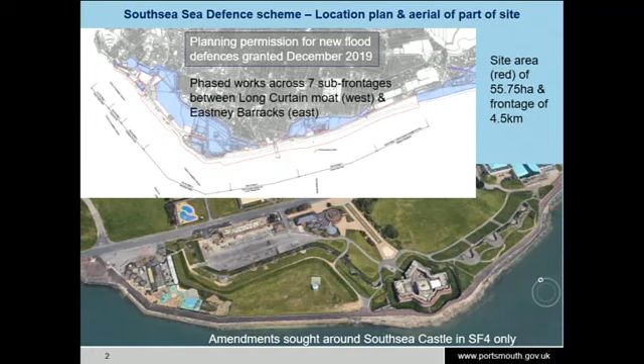Many of you have probably seen this one before, but I included it again because up in that top left corner it shows overtopping events, and in the fourth of those sequence of images is Bandstand Field underwater, part of sub-frontage 4 where the amendments are taking place. The other examples there are breach events, and they're not the only ones that have happened along the frontage.

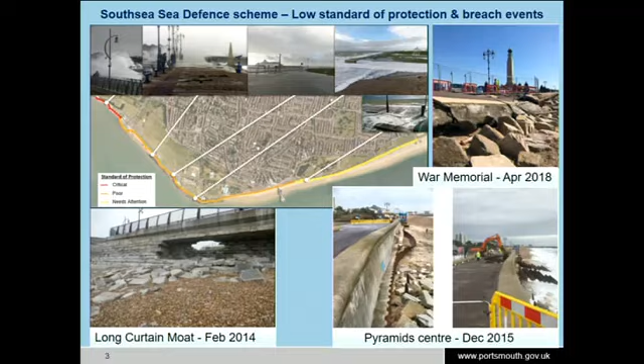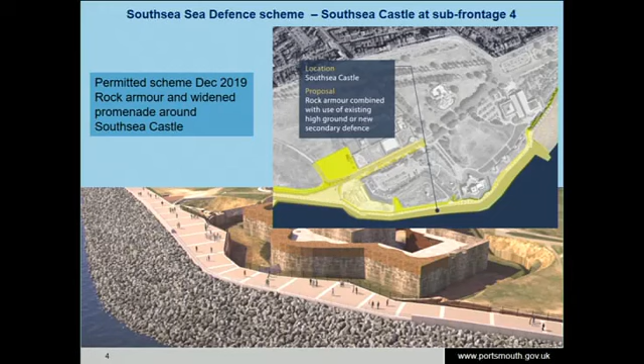This was the scheme granted in December 2019 for sub-frontage 4. You've got a widened promenade that's raised and a rock armour revetment with the high ground behind it being the secondary defence. That is essentially unchanged. In a nutshell, less rock and a wider promenade in the form you see in the top image there. A 4-metre wide promenade at an upper level, 4 tiers of terracing, and a 6-metre wide lower promenade, and then the rock revetment beyond.

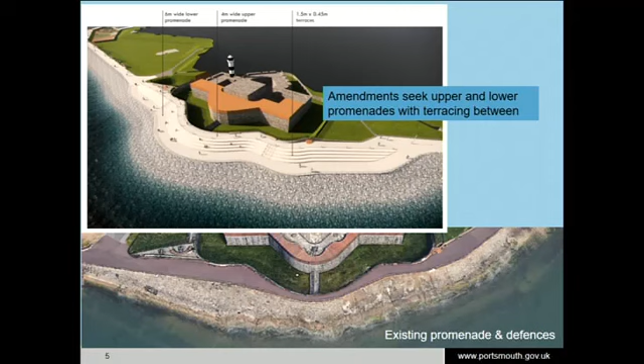It's really hard to try and show you the scale of the changes as a comparison, and I was hoping this might be a little clearer. The image at the bottom is a full cross-section from the pinch point of the promenade that you may be aware of. On my screen it's sort of a pink colour, but the rock armour is reduced, and beyond a red line that I've added, you can see two layers of rock in black superimposed over a wider extent of rock on that image. I won't dwell on that one.

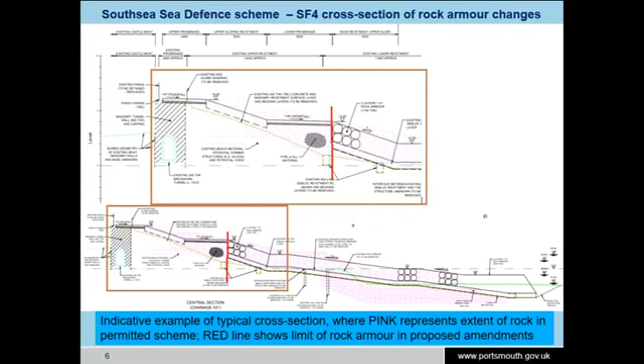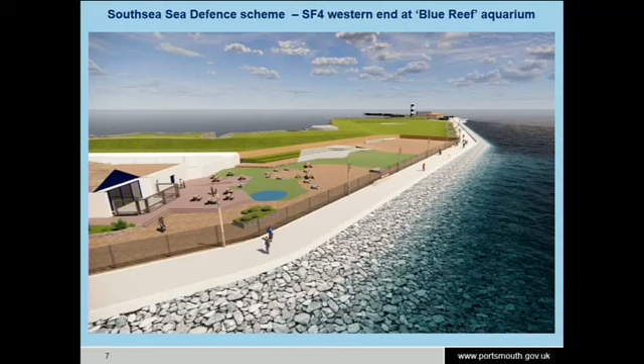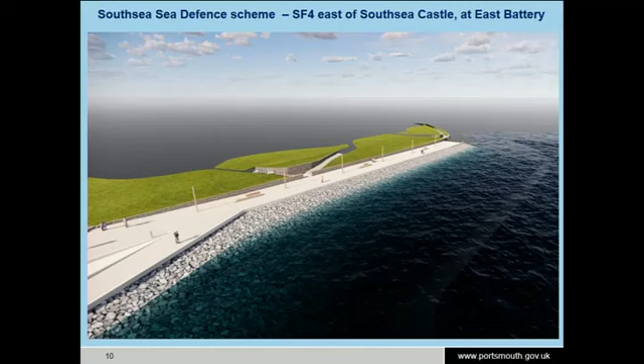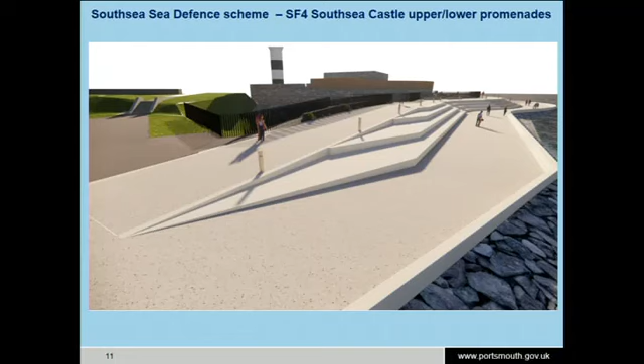If you go to the next series of images, this is the scheme in 3D visuals. I'm showing you visuals because trying to show them on 2D plans, you really don't see an awful lot of information. So here we are, Western End, near the Blue Reef Aquarium. Next image takes us to Bandstand Field. Around Southsea Castle itself. East Battery. This is where the upper and lower promenades split or meet, depending on perspective. This is at the lower promenade, looking at those terraces. That's on the terracing, looking back towards Bandstand Field.

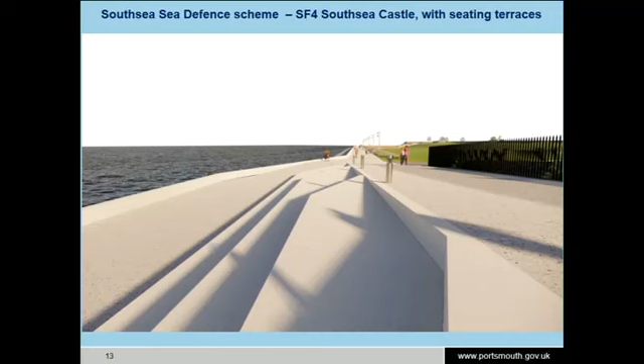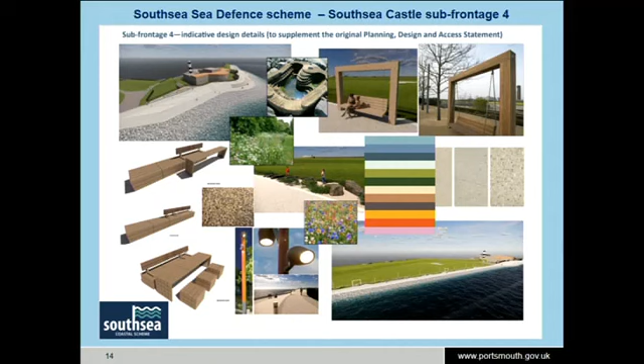It is EIA development, for which there is an environmental statement. It's the same environmental statement as you will have had to consider back in December 2012, but includes an addendum to deal with the impact of the design changes to this sub-frontage 4 only. You've also got key responses from statutory consultees. Natural England note the environmental impacts either remain unchanged or see minor improvements, and Historic England summarise the design changes as an improvement and significant benefit to the scheduled site.

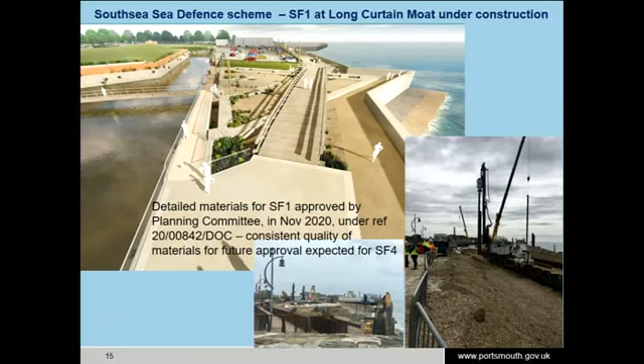Councillor Atkins: I just wanted to be absolutely clear, I think probably everyone in the committee understands, but just for complete clarification. We've seen quite a lot of this report before and already given permission to a lot of elements of the coastal defence scheme. Today it is a request to vary something which relates to the whole scheme, but in terms of the different types of sea defences used, it's only proposed to change one section of the design we've already approved, which is the section around the castle, in order to create the two-tier pathway. Is that correct, essentially? That's perfect. Absolutely.

Yes, a lot of the things requested in the deputation are covered by the conditions. Councillor Atkins: that's precisely the point I wanted to make. The deputation makes an interesting and potentially good point about rock pools - would this site be possible to incorporate vertical rock pools to enhance biodiversity, and does anything we decide today affect that? I asked this question in the pre-agenda and got a fair reply.

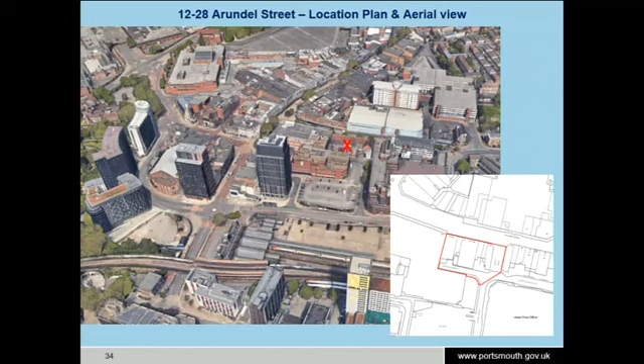The application is for a student purpose-built halls of residence and commercial redevelopment on the ground floor. It's a Part 7, Part 28, Part 21 storey building. You can see the site on the screen, on the southern side of Arundel Street, immediately adjacent to the previous Debenhams building. We'll just flick through - there's the site. The proposal is a substantially tall building containing 591 individual study bedrooms for students and 3 commercial units on the ground floor.

As Jose takes us through some of the images I'm sure you're all fully aware of, we'll pause there. Members will notice we've slightly amended how we present things in your agendas, so we have a lot more imagery in the agendas as well, so I'll try to fly through the imagery to make it a bit easier.

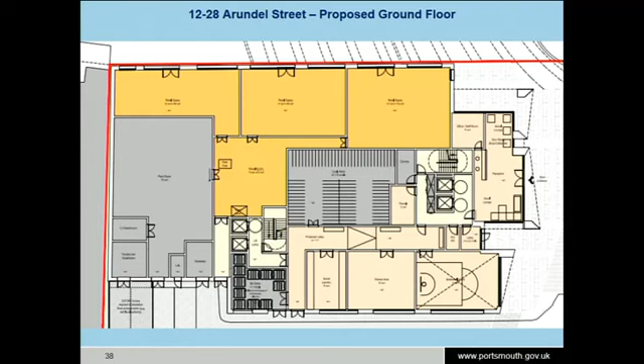As we go up the first floor, again on that eastern side, this is the facilities for students. You can see recreational spaces and study spaces facing outwards, and then the beginning of the mixture of study bedrooms on the first floor and going upwards.

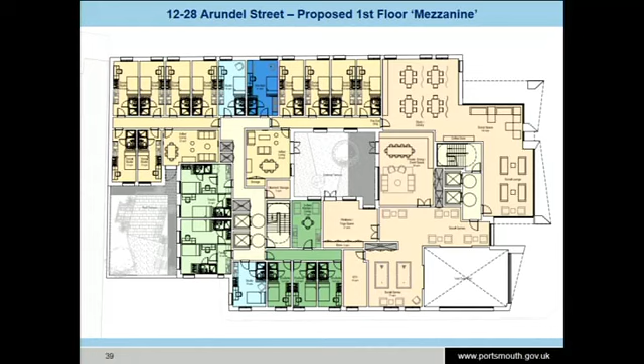You will also note external roof terraces and an internal light well. It obviously goes up from there with the variety of mixed space.

Some are individual bedrooms, some are studios, i.e. bedrooms with ensuite bathrooms sharing a small kitchen. Some are arranged in the cluster flat formation. Flick through those as you go up.

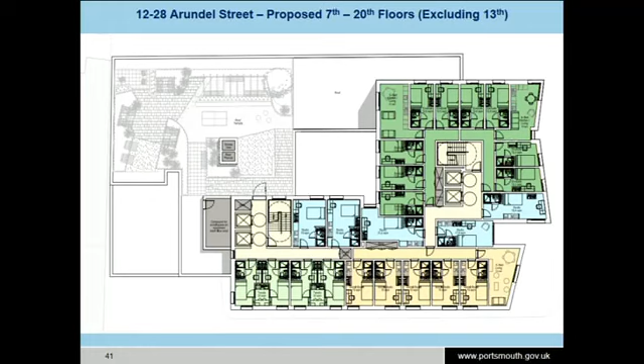So you have another 7th story roof terrace there, and as you'd imagine, student bed spaces as we go higher still.

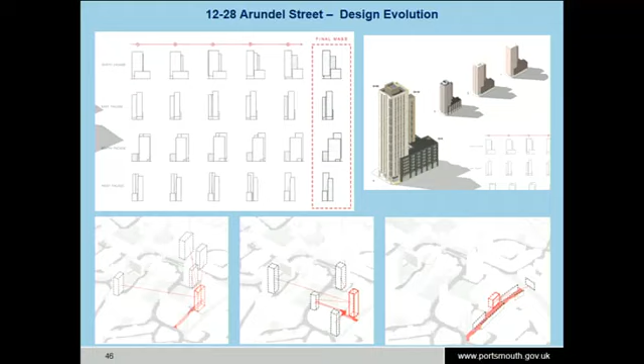The building fronting Arundel Street is a 7-storey building, so it has a very human scale. It's relatable to those that are walking up and down Arundel Street and approaching it from the east and west. And the 2 towers set behind it, of 21 and 28 stories, equally will be viewed in those larger images.

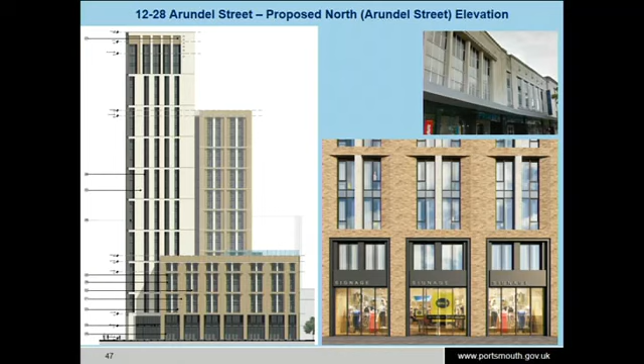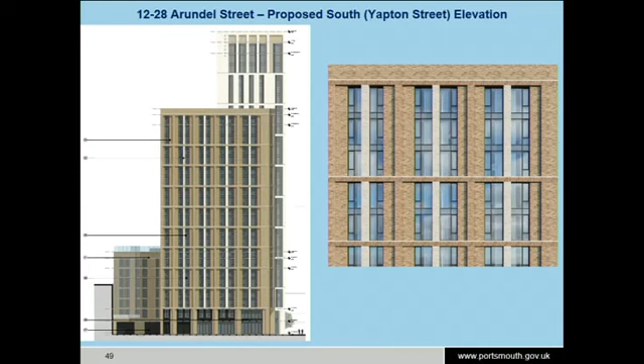As we flick through those, which I think are self-explanatory, I'll just note there are no objections from any statutory consultees and 3 letters of representation raising concerns, as mentioned in your reports.

I will pause there. As you can see, it is a tall building, undeniably. Members will be aware that the law regarding tall buildings and building safety associated with fire safety are changing and have changed.

The procedural issues associated with them affect only buildings that are submitted for planning permission after the 1st of August. So the procedure for considering fire safety for tall buildings is unaltered for this scheme, and it's what you have always done, which is obviously to consider fire safety in the round, recognising that building regulations will match and control fire safety issues.

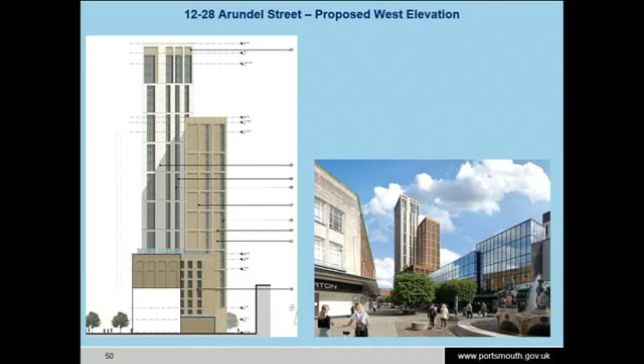We have worked closely with building control, and they are satisfied that all appropriate fire regulations within the building regulations have been properly considered. Keep going.

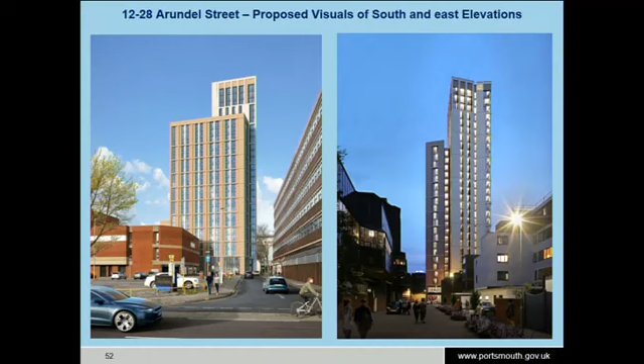So the building is principally, obviously, in the city centre. It sort of straddles the 2 character areas in the 2013 city centre master plan SPD, which does support both tall buildings, in line with our tall buildings SPD, and focusing opportunities for growth and development that would encourage and transform the city centre's economic, social and cultural focus, as covered in the report.

As mentioned, on the ground floor, and you can see the corner of the building there, that's Yapton and Arundel, it has 3 commercial uses and then the entrance to the student space, so it's all active frontage all the way around, a big change for what we have along that eastern and southern elevation at the moment.

3 commercial spaces. I'm saying commercial, not retail, because as you know, the use classes order has changed, and all commercial and service uses are lumped together now. So it will be for the site owner to market those and occupy them with either retail or food and beverage. A cafe could go in there, or indeed any of the other uses within use class E of the use classes order.

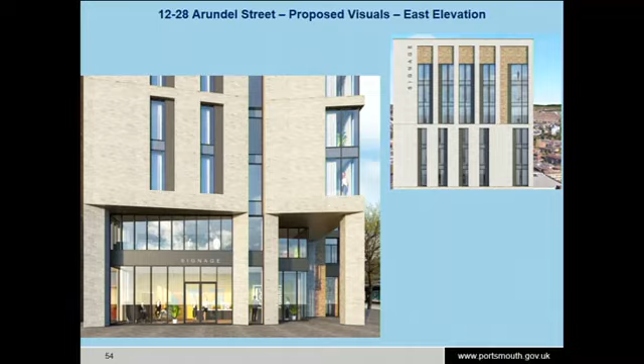It is a tall building, so it will cause some shadowing in Arundel Street, but there is obviously already shadowing in Arundel Street from the existing buildings in the area, and again we're satisfied that that's not of particular concern.

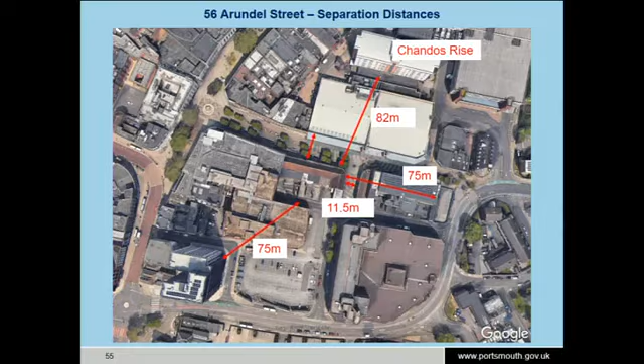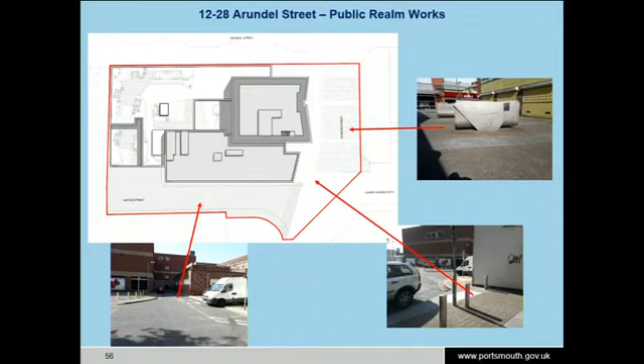The applicant has worked closely with the council's landscaping officers to look at the specific immediate public realm around the building. There's some well-valued, high-quality public realm landscape on Arundel Street at the moment, which we're not looking to remove. But as we turn the corner into an area that isn't publicly attractive now but will become more active with this development, negotiation has achieved a £50,000 financial contribution to the council so that money can be spent on improving that public realm, based on illustrative schemes the landscaping team have been working up. Specifically, a Section 106 payment would cover that.

The scheme has no objections from any consultee, so issues such as ecology, drainage and SuDS have been built into the scheme from first principles and are entirely acceptable to your professional officers.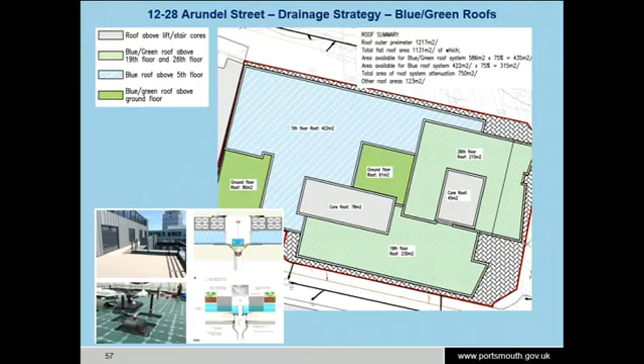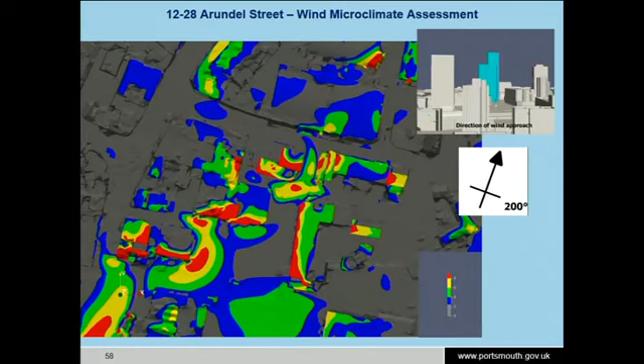Brief mention of microclimate - all tall buildings have those impacts. We are satisfied full microclimate modelling has been carried out. While there will be a little additional wind coming around that corner, that's largely in the carriageway and is of no concern to officers. We're satisfied that's not a reason to withhold planning permission.

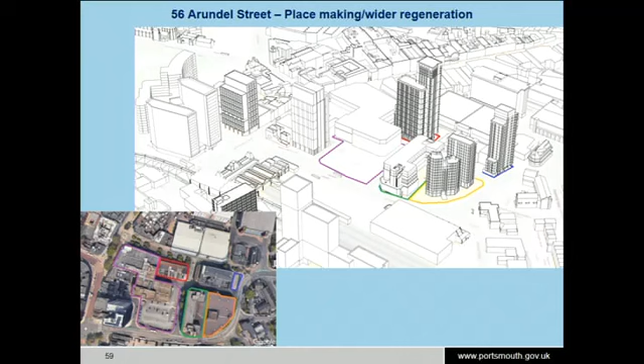The purpose of this is to highlight the context that this is a tall building. It will be the second tallest residential building in the city, but this is an area of substantive change, most recently and going forward. We anticipate a need for higher density, taller buildings in this part of the city centre to support economic growth, meet our housing need, and regenerate the activity the city centre offers the wider community. So while it's a tall building, we're entirely satisfied that in its immediate context - the 7-storey building on Arundel Street - and in longer views and wider townscape, it will be appropriate and will be one of many buildings seen as one approaches or moves around the city in the skyline and cityscape of Portsmouth.

Just flicking through my notes to make sure I've covered everything. There is an extensive number of planning conditions dealing with both the specific management of the site and some details we're looking to nail down, such as architectural detailing of windows, etc. We're satisfied that covers all those necessary matters.

I've covered amenity to neighbours, which I think is important. Would note highways impact - no objection from the Highway Authority, but there is a slight under-provision of cycle storage. There's 176 spaces for cycle storage within the building, so while that's slightly lower than the arithmetic of the parking standards SPD, we're satisfied that's a reasonable design for it.

The ecology of the scheme - both bird aware and the nitrate nutrient neutral solutions - have all been built into the Section 106 and agreed with the applicant. On top of that, the site is liable for around £2.5 million of CIL, as mentioned in the SMAT, which would deal with other infrastructure issues in the wider city and immediate locality.

In conclusion, it's an ambitious building, but one we think Portsmouth deserves. It deserves that ambition for its city centre, where we need to focus our growth and opportunity. It brings back a secondary frontage into active usage with new viable spaces on the ground floor, and it provides for a need in the city - 591 student bed spaces, equivalent to around 236.4 homes when measured against the government standard methodology for homes - and will meet that need for students, ideally attracting them out of poorer quality accommodation elsewhere in the city into this location, where they can more easily access the amenities of the city centre and the university itself.

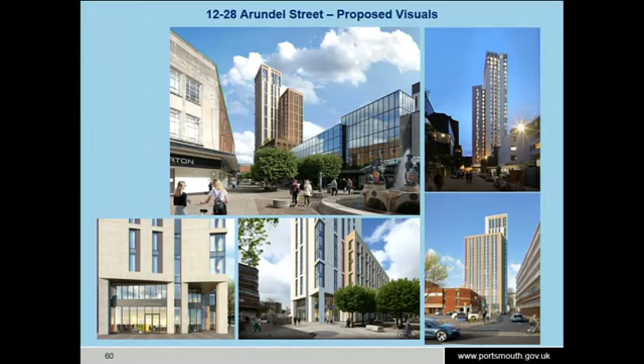Thanks for that reminder. Yes sir, what's your name? Because you weren't here when I first came out. I beg your pardon, it's Michael Lampard. Mr. Lampard, would you like to give your deputation? Thank you, yes, I'm Michael Lampard, I'm an architect, I work for Christopher and Wright, we're Fusion Students Architects, and I'd first like to thank Ian and Eze and Gary, who's not here, for the time they've taken with us to define and refine this scheme, and also thank you to the councillors for considering this today. So the application provides, as Ian's identified, student accommodation, 591 rooms in the centre of Portsmouth.

We believe it's much needed in the city, helping to free up HMOs, as we just discussed. The student demand report identifies a continuing need for students in the city and good quality accommodation, which Fusion provide. As I said, we've undertaken extensive discussions with your internal team, so thanks for that as we've gone through the process. We've also undertaken a full day of design reviews, which was very positive and helped us refine the scheme, and we liaise directly with stakeholders and the wider public through our communications agency, Marengo.

So throughout the process... I don't mind. Joe, beg your pardon, if you go out at this stage you won't be able to vote on it. Oh, okay, is that all right? Sorry, I beg your pardon. I know you didn't, I saw you heading off, I thought you might be heading for a drink of water. I'll cross my legs, is that all right? I'm so sorry. The alternative is that after the deputation we just adjourn for a couple of minutes, Chair. Would that be all right? Can we just hang on for a little break? Yeah, Joe, do you want to shoot off just for a few minutes? Oh, I can go now? Yes, I beg your pardon, I'm so sorry, everybody knows what you're about to do. Well, hang on, could we perhaps let the deputy finish? I do apologise, Councillor Hooper. Should we let the deputy finish first, perhaps, Chair? She's on her way now. Hang on, sorry, I beg your pardon, sorry to muck you about.

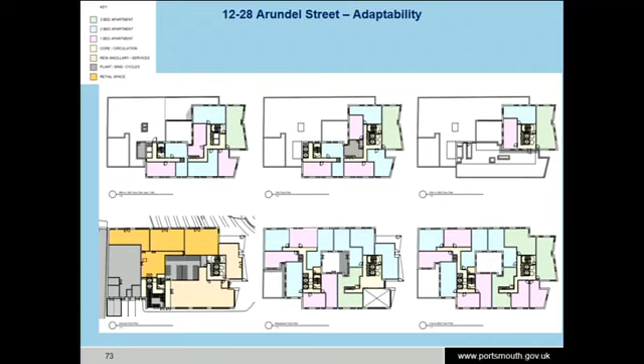I've been just looking at the street view and satellite pictures of the existing location here. And I'm asking myself, overall, do I want this building for the city or do I not want this building? And I'm coming to the conclusion, I think, on balance, it would be better for the city that the building be built than not be built.

Now, I don't think any of us are overly keen that it's student accommodation. We would rather see affordable housing. But I think one thing this applicant has done that does impress me a lot is considered the possibility of conversion if necessary. I think this is an area that is in bad need of regeneration.

And I think, as has been mentioned by others, this is a high-quality design building, more of the Gunwharf style, more of the type of regeneration that would fit with the future regeneration of the city centre. And I think particularly the different heights and scales of the different buildings. So yes, the tallest part is very tall, but it's not the whole site. It's a narrow area of the site. I think overall it will be attractive to the skyline and is suitable for a city centre location.

This isn't on top of a lot of other residential housing. There is some other, I do recognise there are other flats in the area, but it's not in a suburb. It is in the city centre. It will add much needed footfall to Commercial Road.

I think the building is high quality, the design is high quality, and the management that we've heard about so far of how the building will be managed for students is of high quality. So I think this is a building that overall will benefit the city.

I think something which was mentioned, and obviously CIL can always change as the building progresses and costs go up or down, but the idea of I think it was 2.5 million CIL for Charles Dickens is also extremely attractive. Even if it's a tenth of that, it's something we can do a lot with for that area and for other parts of that ward that could see the money improve.

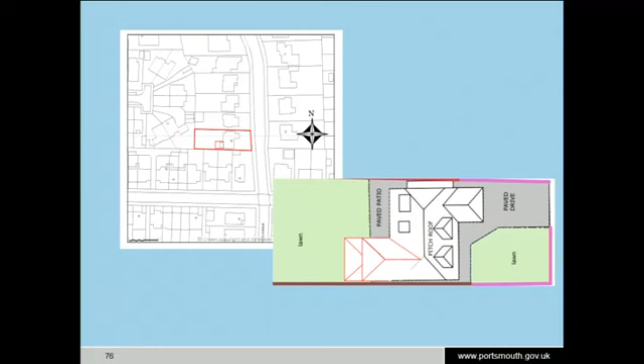When this application was put forward, we received a number of objections from nearby local residents and neighbors, especially those to the south, where we received 4 objections. The objections mainly refer to the depth of the development in question, the proximity to the neighbors' boundaries, the use of render rather than natural brick which would make it more compatible with the host property, and the loss of daylight and sunlight, including lastly the loss of privacy to rear gardens.

This application, as presented, had before officers had looked at these objections, the case officer had gone back to the applicant and requested further amendments to the scheme, mainly a reduction in the depth of the proposal and also changing the materials from render to materials compatible and similar to that of the existing property.

Officers have considered the issues and main considerations I've mentioned previously, and the neighbors' representations, and looked at the depth which can be seen in this slide - 4.7 meters for the first floor element of the proposal and 4 meters depth for the ground floor element. Officers' considered opinion is that the impact on amenity is mitigated, especially with the reduction in depth of the elements and with the materials changed to make it more compatible with the host property, and the proposal in question is due north of the gardens to the south.

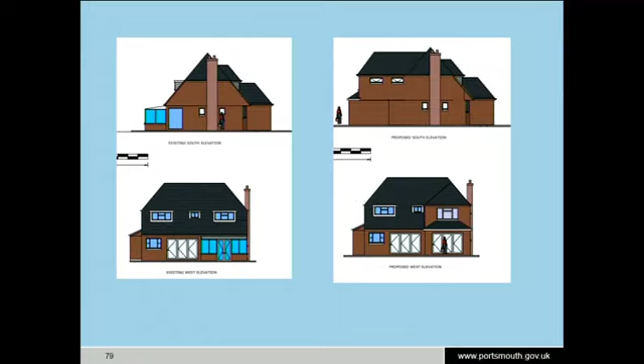I have a couple more questions if you don't mind me carrying on. One of the deputies submitted - I don't know if the planning officers have seen it - a picture where he's superimposed the extension onto the garden. I've had a quick look online and it looks roughly accurate. Would you agree that the extension does appear from the plans to extend beyond the boundary of 31? So it is - do you have any issues with it? Would you comment on it? Do you think it's an accurate representation of what the view will be like from 31 Mansfield?

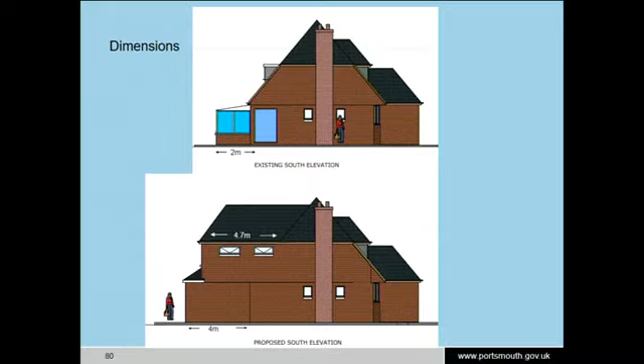Thank you, just one quick final follow-up related. I'm not in any way suggesting the deputy tried to mislead us, or that the picture isn't accurate - I'm accepting that it effectively shows a solid wall across his boundary fence, as the picture broadly describes. But it essentially says in 5.8 that officers considered the depth of the extension as originally proposed to be a little too much with respect to the neighbour's outlook to the south, and the applicant agreed to a reduction by 1 metre. I accept also that the bright render was taken away, which is an improvement.

There's a slight vagueness to that statement in the sense that it says a little too much. Is it open to the committee to consider it's still a little too much, or do you feel that you've now dealt with it as a result of the discussions and negotiations that have taken place?

If I may, members, officer reports are written for the audience, so yeah, obviously the language there has a little bit of vagueness. It's not just the depth we're looking at, it's the architectural interest. A straight up and down two-storey wall has less visual interest compared to what we now have, a bit of single-storey roof form coming into there, which they now have with the existing conservatory. So we're satisfied, as well as the change in the depth itself. 1 metre doesn't actually make that much difference, but it's creating greater interest in that architectural elevation in that you do have that chamfered corner.

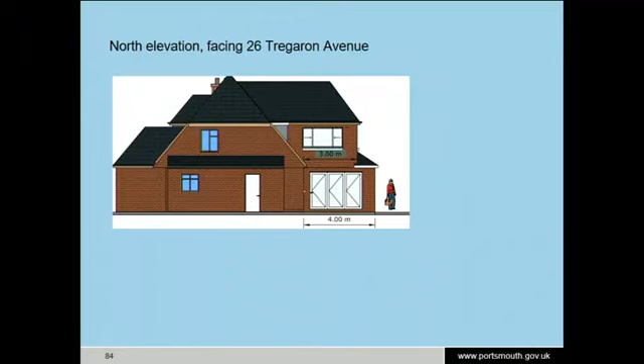Okay, members, if we can put the slides back up, the team did pull up some images, so it should be slide 85. Apologies if I didn't show them - they weren't part of the presentation because we wanted to see if anyone wanted to talk about it, because every application must be judged on its own merits.

The fact that somebody had a larger or smaller extension, I would stress, is irrelevant to your judgment. It's whether this extension is appropriate. A key distinction between 28 and 24 is, as the objector raised, 28 backs onto a rear garden, whereas 24 sits between side gardens - it's in a linear form, as you can see from the images here. I'd have to check the numbers, but gut feeling it's a larger extension by square meterage. I don't believe there's any fundamental objection to the scale of the extension as the character of the area - it's the impact of the extension on that facing neighbour that is the concern, and that's the judgment before you.

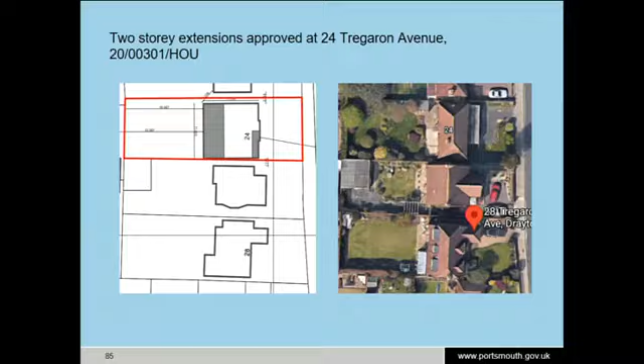Councillor Atkins: this might be a ludicrous hypothetical you're unable to answer, but do you think your advice would be substantially different if it was on the other side, next to 26, rather than how it currently appears, backing onto stuff to the south? If it was on the other side it would be side to side with other properties only - would that improve the situation or make it worse, or is that a ludicrous hypothetical?

I would say, Councillor, that if it was to the north of its own site, it would have a greater impact on 26.

Okay, Councillor Hooper, have you got any questions? Can I just quickly ask, in terms of the glazed window, there are two windows on that elevation - I'm presuming one of them was already frosted and this is making the other one frosted, so they are both... No? No, if I can assist members, on the south elevation they're installing two new high-level windows, so they don't need to be frosted, they're above normal eye height.

That's covered by the strict accordance condition. It's on the northern elevation, facing up to number 26, where there is a large standard window. That's the one we're requiring additionally to be frosted, because otherwise it doesn't affect either of the neighbours who have spoken to you today, but it does allow unobstructed views north towards number 26.

And my memory from the plan is that there is more than one window in that bedroom, so that there would be a view out. It has the high-level side-facing window to the south and a normal rear-facing window down the garden, which is appropriate for outlook. Okay, thank you very much indeed.

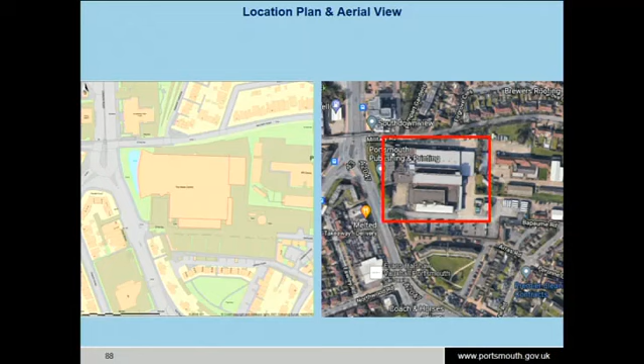And this just gives a view of the street view, and that is the proposed signage - we'll give further details in the next slide. The main considerations with this application are the visual and aural amenity, and also the impact on public amenity and safety.

Following receipt of the application and consideration, an objection was received from a neighbour with regards to the proposed signage, intended to be oriented to the rear of neighbouring properties, which will cause statutory nuisance, and again that there will be light pollution and disturbance at night, and further that the illumination would have an impact on bird life and local wildlife. Officers have considered the site and the surroundings.

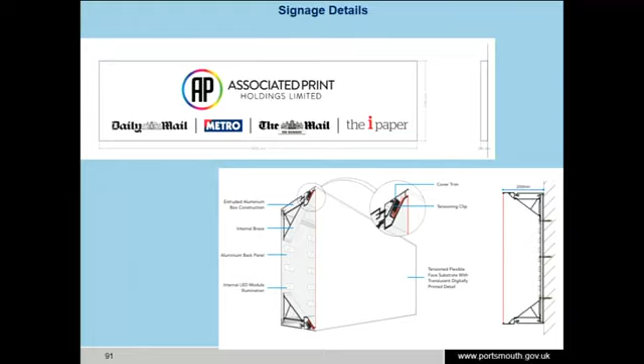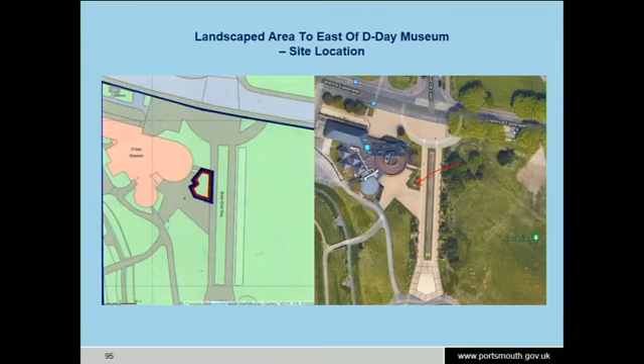The application site is located to the east of the D-Day Museum, and the site is within the conservation area. There's quite a lot of heritage assets - you've got Southsea Castle, and it's also included in the Southsea Common, which is an area included in Historic England's Register of Parks and Gardens of Special Interest. And there's a number of listed buildings and scheduled ancient monuments within the immediate area.

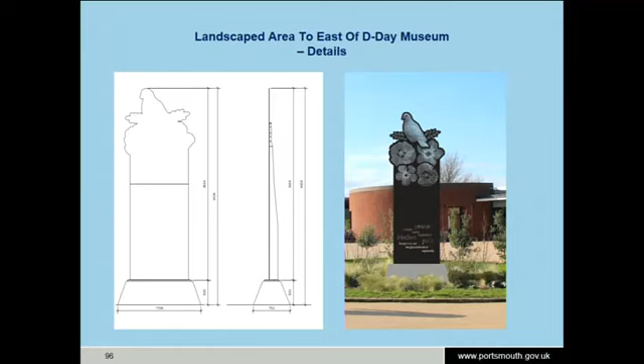Considerations for this installation have to do with the principle of it, the heritage impact on heritage assets, and the public amenity. With regards to principle, it's located in an area with a number of street furnitures, but it's an open park, and it's considered that the installation is acceptable in principle. With regards to the impact on heritage assets, that's been considered, and the view is that, in light of statutes, there will not be any substantial harm to any of the heritage assets in question. With regard to public amenity, as said before, it's within a public park, and it's believed that it's well suited for its location.

And hence, officers have recommended this to yourselves for conditional permission. Albeit it's retrospective, it's one that we are comfortable with, that it meets all the statutory requirements, especially with regards to impact on heritage assets. Thank you, Chair. Thank you, Ezzy. Members, any questions?

Councillor Atkins: Sorry, could you quickly repeat why it's retrospective? So why was it installed during the process of the application rather than waiting for the conclusion?

Thank you, Chair. I have no reason before me in which the applicants have decided to go forward with it. But my understanding is that it was installed during the course of the application, so the installation did not take place before the application was submitted. So in the course of its consideration, it's now become a retrospective application because the installation has now been completed.